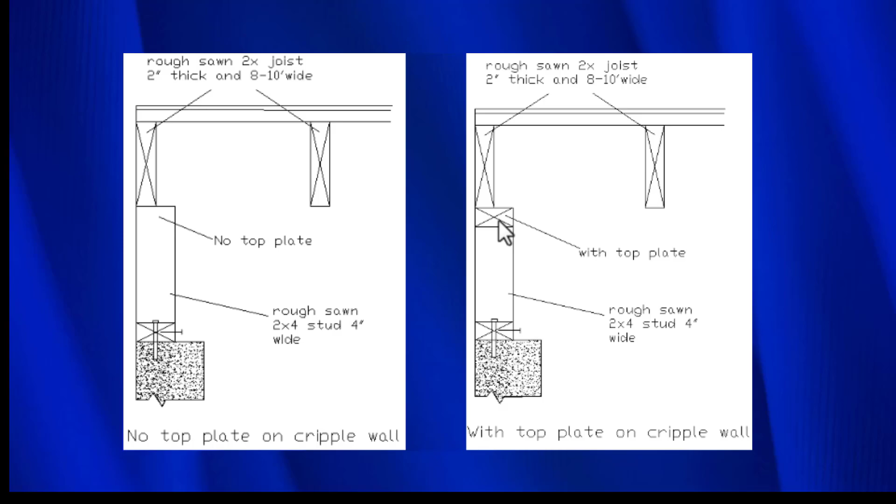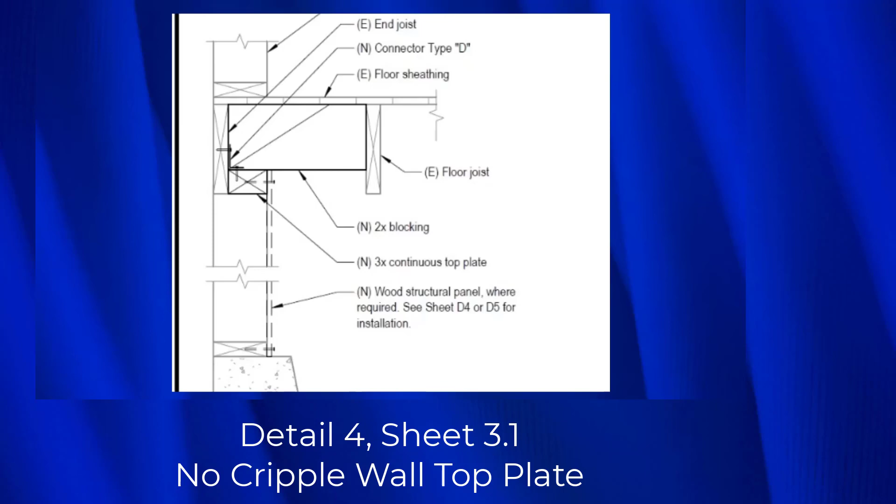Virtually every house that we've seen in this San Francisco Bay Area that does not have a top plate is built with full dimension lumber. So that would mean this right here would be a full 4 inches. This joist right here would be 2 inches wide. And what that does is leave a gap here of 2 inches between the joist and the edge of the stud. This detail requires that a 3x continuous top plate be installed.

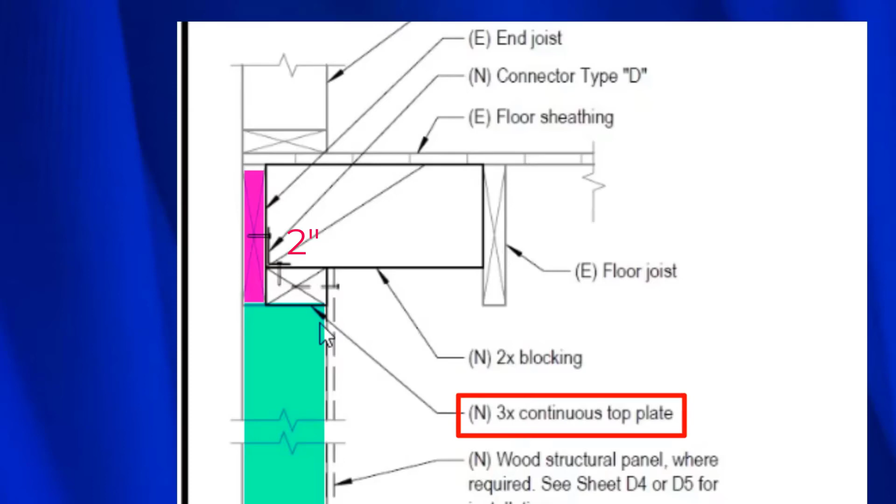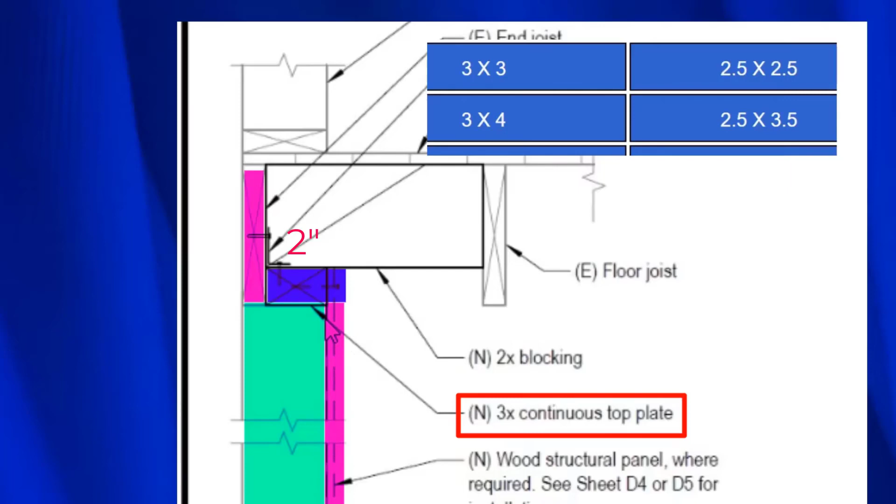And if you look at this table, you will see that there is no dimension in 3x lumber that equals 2 inches. Let's say we put in a 3x3. When we put that 3x3 in right here, there is an overhang of the framing that comes about right here. And then when the plywood tries to go up against the stud, it's going to hit that overhang and you can't install it. Let's go ahead and see what it would take to build this detail.

So remember, this is old growth wood, so this will be a full 4 inches, and this will be a full 2 inches. I've never seen a situation where this was not full dimension lumber. Once codes develop, they always put in top plates. So you only see this in the old houses where the lumber is full dimension.

So this block that was put in here would have to be 2 inches from here to here. Because again, this is 4 inches, this takes up 2 inches, and that means we have 2 inches right here. And they don't make lumber that's 2 inches wide. So you'd have to take a 3x6 or a 4x6, something, and rip it down so that this is a full 2 inches. Now you can imagine doing that in the field is pretty hard. A skill saw won't go through lumber that's 2.5 inches thick, so you actually have to rip it on 2 sides and hope you make it.

Now the other thing that has to happen here is you have to put in this L90. So this L90 nails into the 2-inch joist, then it nails into our new block, and that completes our load path.

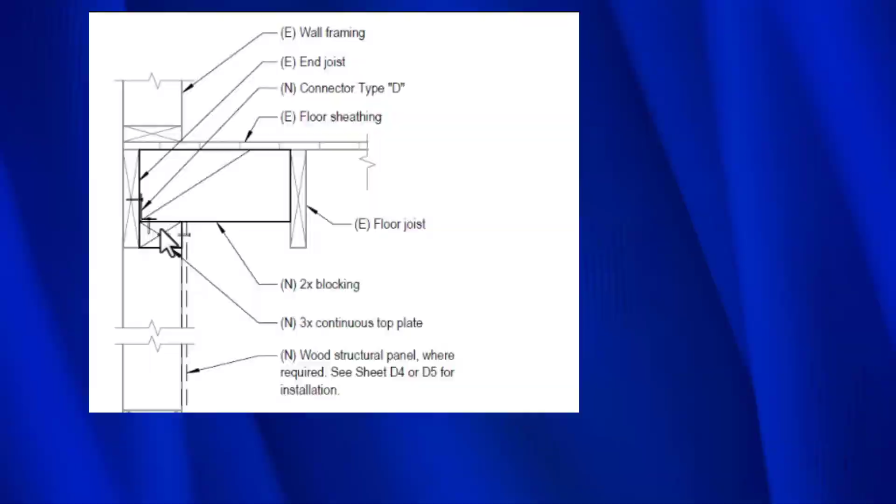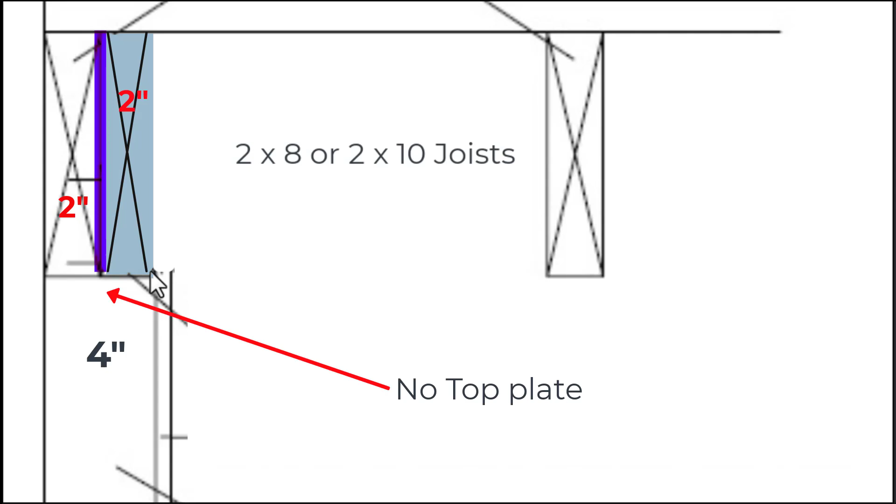Now these are full 4-inch wide studs, and the end joists, or in fact all the joists, are 2 inches wide. And so if we put a piece of plywood up there, we can't nail it into the top plate because there's not a top plate there. So what we need to do is take a new 1.5 wide 2x8 or 2x10, and then take a piece of 1/2 inch plywood and staple it to the side with 1.5 staples. Then we take that assembly and put it on the side of the existing end joist on top of the stud, and nail it at the top with 12-penny nails to attach it to the existing joist.

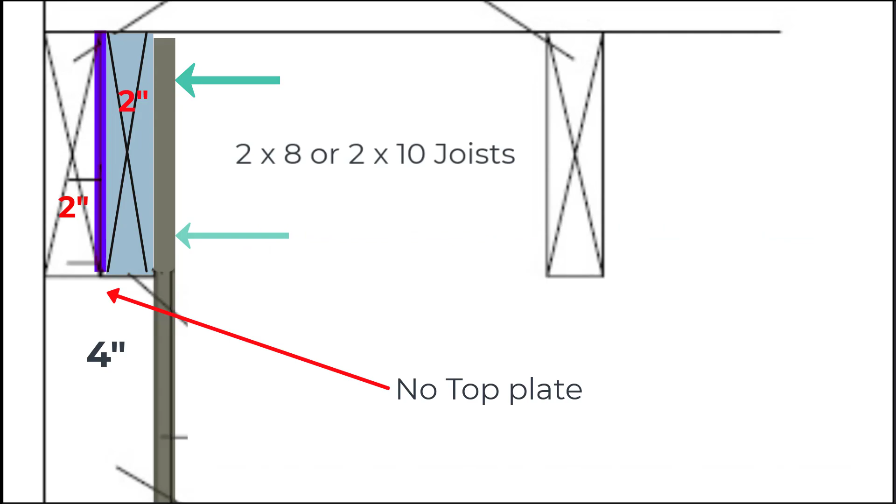And then we'll take a piece of plywood and set it in place like this, and nail it into the entire assembly. And that completes our entire load path. It's very simple.

What we do is use a system that we believe makes the most direct and most effective connection. So remember, the distance between here and here, this joist, is a full 2 inches. The distance between here and here is 4 inches. And so that means this gap right here is 2 inches. It's not 1.5 inches, it's 2 inches.

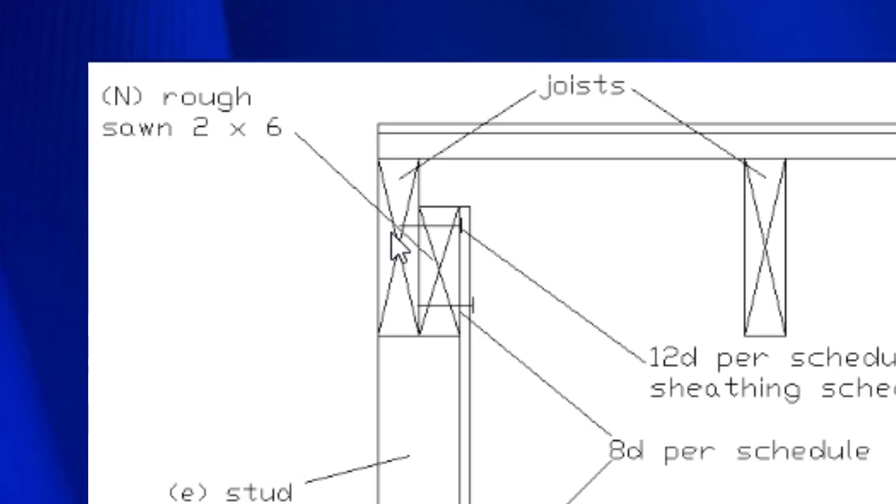So what we do is go to a builder supply and have them rip down a 3x6 so that this dimension here is 2 inches, and this dimension here is 5.5 inches. Then we take that block and nail it into our end joist with some 12 pennies. Remember, 12 pennies are 3.25 inches long, so you get the penetration you need. And then we put our plywood in, and nail the plywood to the block, and we're all set.

As you can see, there are many ways to make this connection. There might even be more that I haven't thought of. Now, I've never done the first one that's part of this new retrofit guideline, but I have done the second and the third one, and all of them will work. So you just need to find which one works best for you in every individual situation. It seems like you always find something different, and it looks like any of these will be helpful at some point.